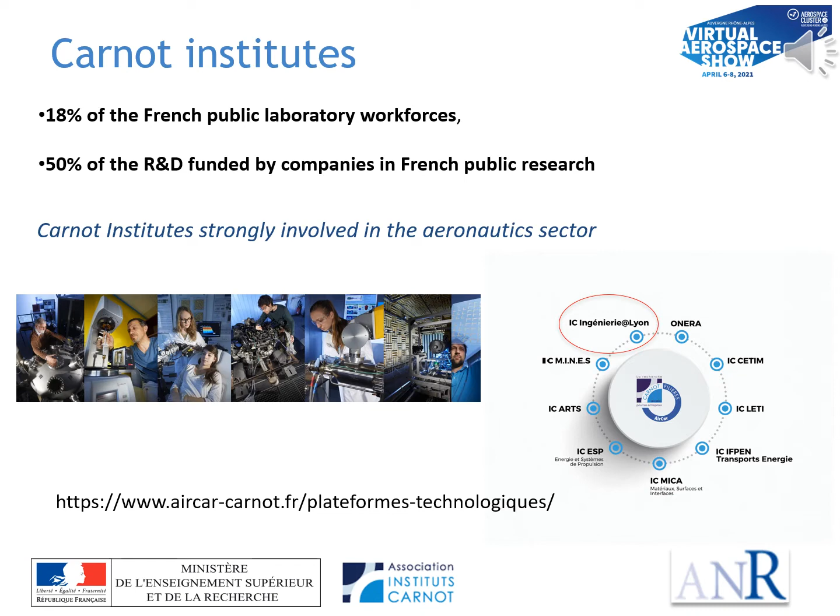Our mission is to support companies in their product and service innovation effort. Ingénierie Lyon is a group of 13 French public research laboratories and 2 technical centers of excellence located in Lyon and Saint-Étienne. All of our laboratories are accredited to the research tax credit, so the industrial partner may deduct 60% of its research and development spending in the frame of an R&D collaboration between the research public labs and the private company. It is always more interesting than in Germany or Switzerland, for instance.

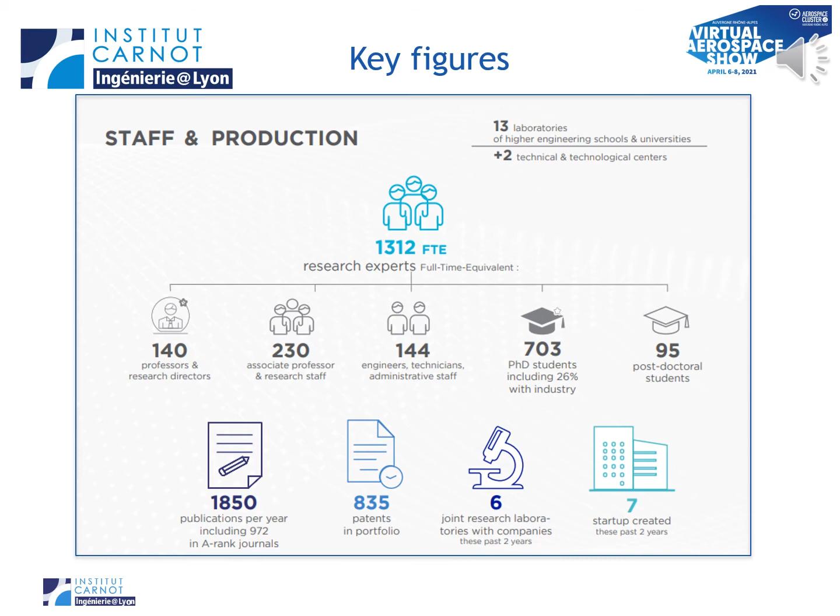You can see on this slide some key figures of our organizations in terms of means and human resources. You can see that our labs produce very high publication levels. The main research collaborations between our labs and private companies are 3-year contracts, such as doctoral theses with PhD students supported by research experts.

Concurrently, Ingénierie Lyon gives companies access to more than 1,300 experts and high-level research equipment in the field of innovative materials and processes, smart machines, and engineering for health.

Now, if we focus on Ingénierie Lyon activities regarding the aeronautic field, you can see on this board that a few tens of millions of euros of research contracts between all labs and industrial partners have already been carried out over the last 10 years. Here we talk about a long-term approach, with shared labs with these industrial partners, industrial research chairs in the national or European frame. Thematic addresses concern aeroacoustics, mechanical transmissions, high-performance composites, structural health monitoring, lubricated interfaces, but also power electronics for aeronautic issues.

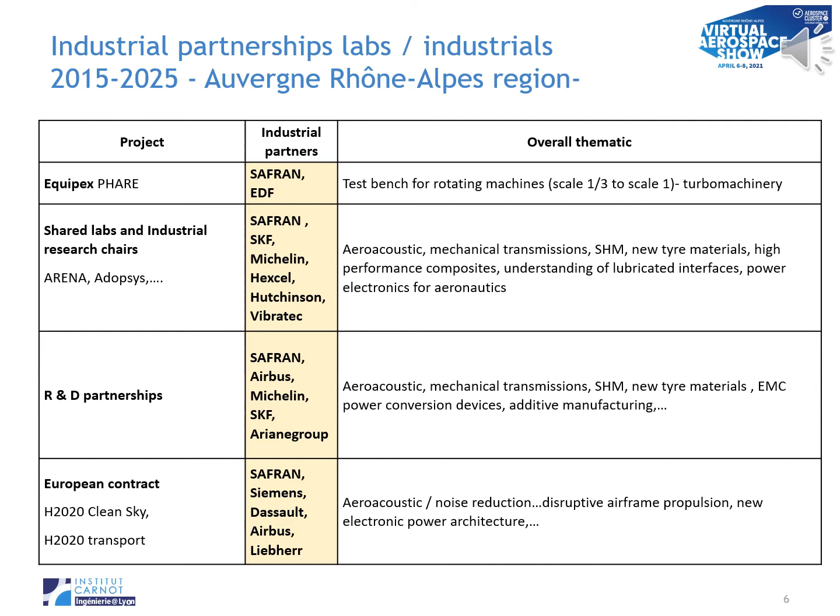So, what is the current state of play? Between 1990 and 2016, worldwide aviation CO2 emissions more than doubled. The growth rates currently forecast and the historical rate of technological improvements will lead to aviation global CO2 emissions tripling by 2050. According to the IPCC, aviation radiative forcing is 3 to 5% of the total anthropogenic radiative forcing due to global human activities.

A climate warming scenario limited to 1.5 degrees is pointed out by the European Commission in a recent report. This report highlights the pressing need for deep decarbonization. It shows the scale of the contribution from various sectors, including transport. This report shows clearly the challenge for aviation and the need to tackle emissions using advanced technology and fuels. Whatever the forecasts, the issue is well-being, resilience, and sustainability.

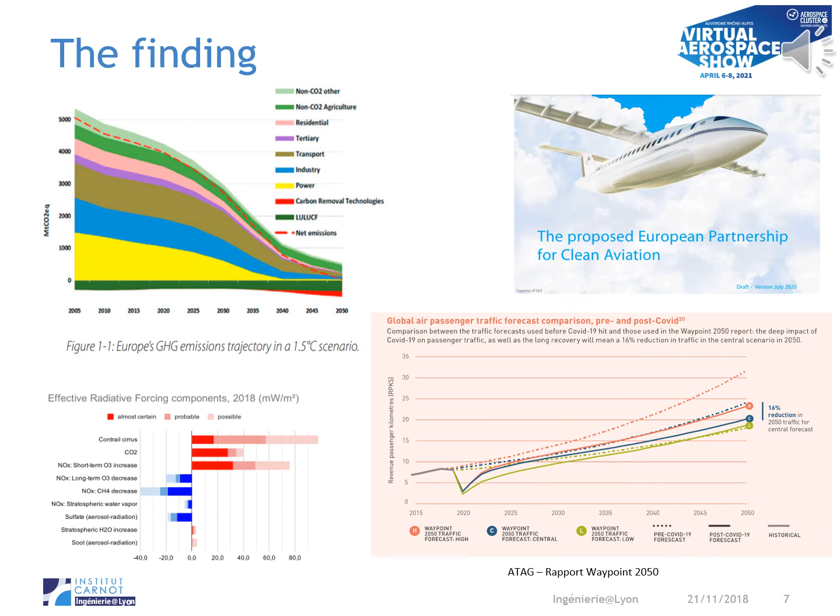The challenges of the aircraft of the future, which aim to accelerate and demonstrate integrated technologies for the decarbonization of aeronautics while ensuring safety and security, are the 5 described on this slide: new aircraft architectures, new propulsion architectures, advanced materials, systems for efficiency on board, energy management, reduction of noise, and non-CO2 emissions.

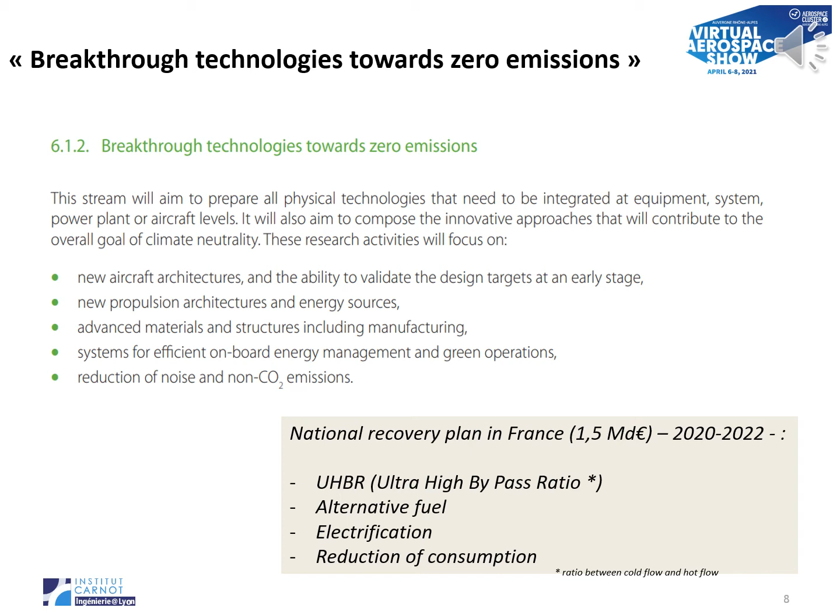You can also notice that there is a national recovery plan in France managed by the CORAC organism. This is the first short-term program, between 2020 and 2022. This program deals with 4 main thematics: high dilution engine, alternative fuels such as hydrogen technologies, electrification of appliances, and reduction of consumption.

You can see on this slide the skills matrix for clean aviation of A-level labs that are direct members of Ingénierie Lyon Carnot Institute, regarding the 5 issues identified by Europe. The field of expertise covered is quite large and addresses propulsion, materials, and critical phase optimization. I will be pleased to give you details of the content of this matrix later.

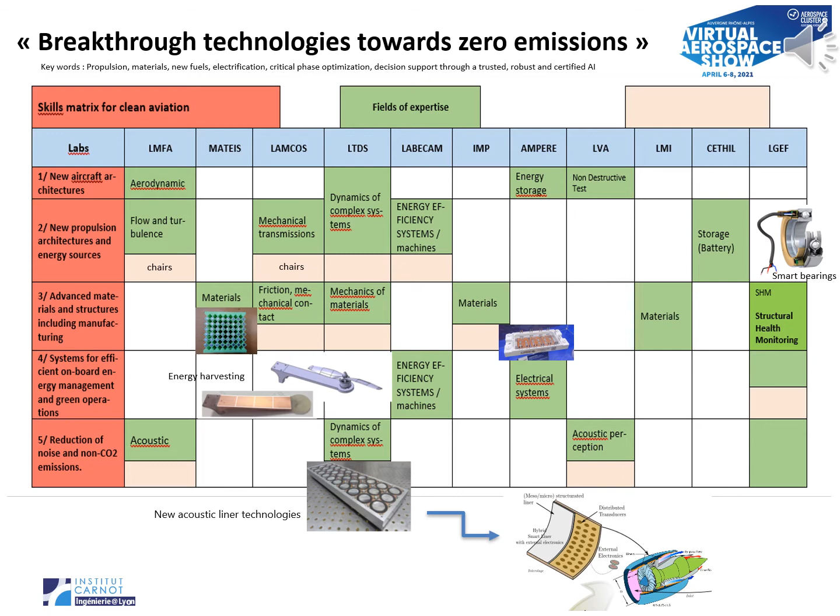As I said previously, I'm now going to show you 4 concrete examples of innovations directly linked to the 5 issues. The first example concerns new acoustic liner technologies. The Salute project is funded by Europe H2020 Clean Sky 2 program, grant agreement number 821093. Clean Sky is the largest European research program developing innovative cutting-edge technology aimed at reducing CO2, gas emissions, and noise levels produced by aircraft. Salute means Smart Acoustic Lining for UHBR Technologies engines.

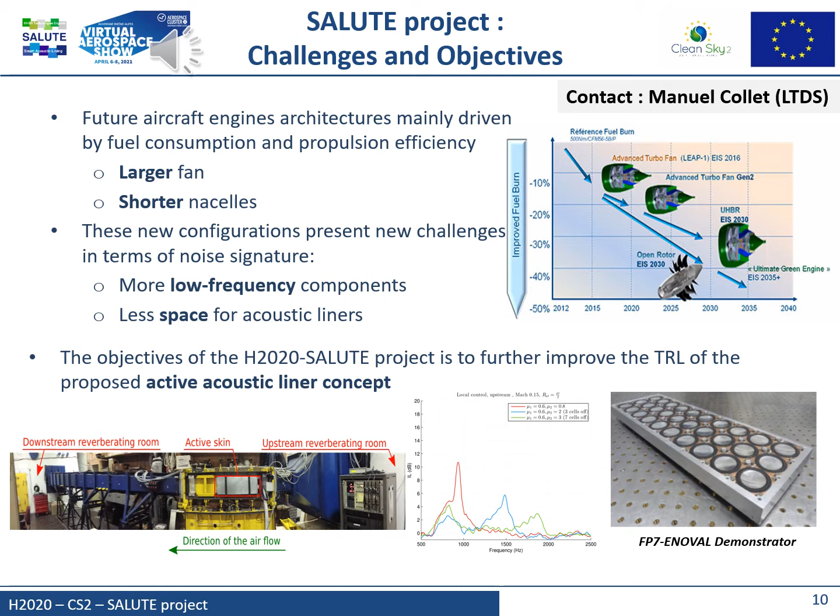New acoustic liner technologies are based on arrays of unit cells. Each unit cell is the assembly of a transducer, 5 microphones, and a control card with localized or distributed control strategies. The grazing flow test campaign comprises acoustics and aerodynamics measurements to characterize the aeroacoustic flow conditions, the membrane behavior, the acoustic impedance, and the resulting insertion loss.

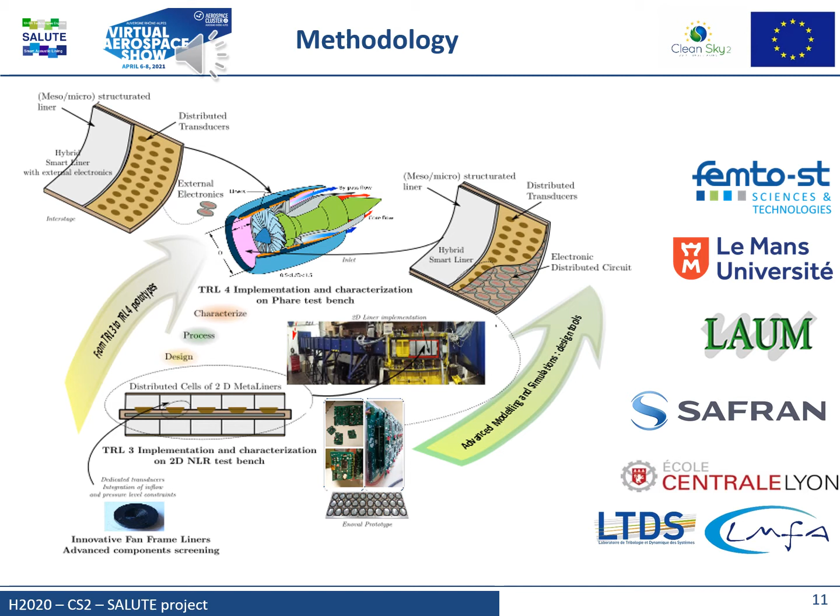At the end, theoretical and numerical investigations are carried out for designing innovative specimens. Specific focus is placed on the realization of prototypes for evaluating the metacomposite liner performances in 2-dimension or 3-dimension liners, its process complexity and robustness. The insight gained in this project is new tools for obtaining innovative samples. The acoustical experimental tests demonstrate efficiency and robustness of such technology for controlling UHBR noise emission.

Second example concerns structural health monitoring. In aeronautics and aerospace, there is a growing need for new sensor materials suitable for direct health condition monitoring of complex structures.

Piezoelectric materials, because of their ability to translate a mechanical impulse into an electric response, are commonly used as sensors in vibration monitoring, impact detection, and ultrasonic receiving sensors.

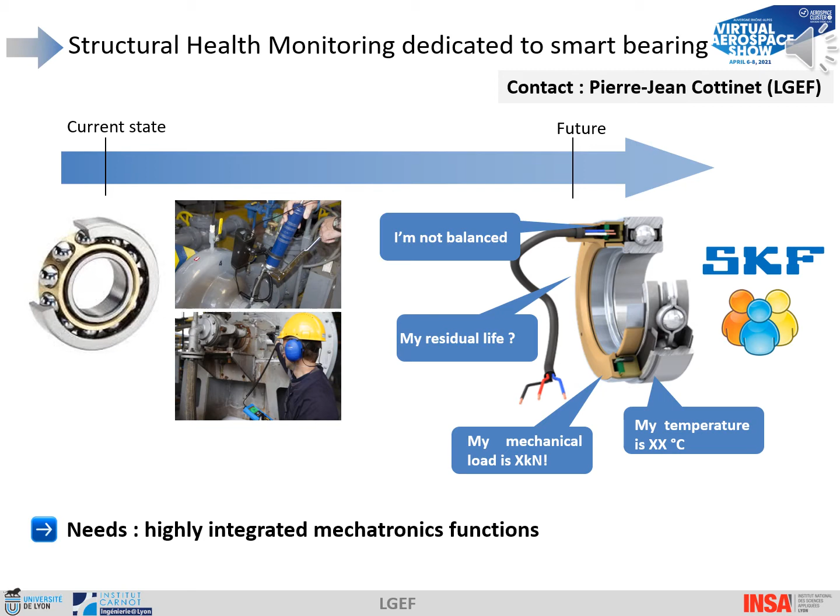The study made by LGEF laboratory focuses on the development of a piezoelectric sensor coating made of silicone matrix filled with PZT particles using electrophoresis. To be simply integrated into intricate systems, these sensors must also be lightweight, non-intrusive for the structure, with high mechanical resistance and easy processability.

In some specific applications, sensors based on electroactive materials can be printed to be used in additive manufacturing.

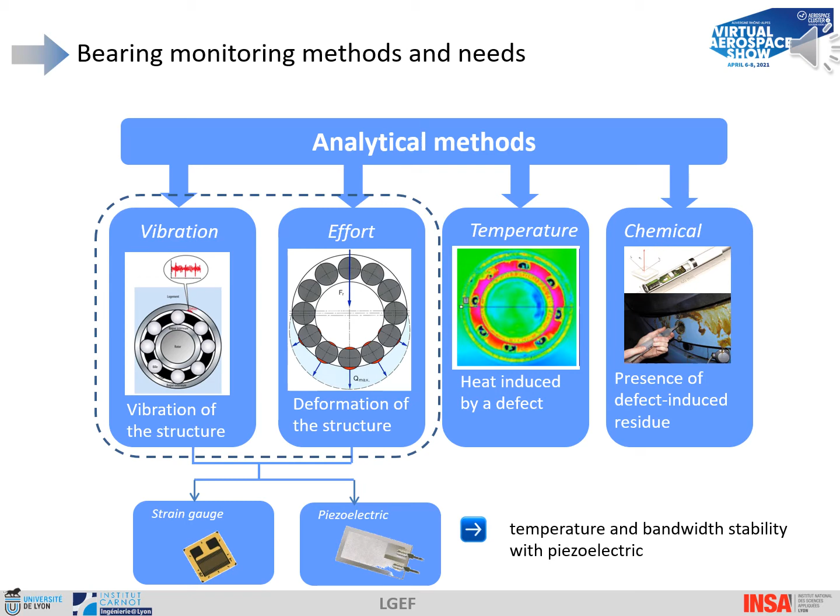Piezoelectric composites are the most suitable materials for the smart bearings application. They are able to combine the piezoelectric properties of the filler with the flexibility of the matrix. Here, PZT powder and silicone base were mixed by ultrasonication. Then an AC electric field was applied to the sample's electrodes, leading to the formation of aligned particle chains along the poling direction.

The implementation of the piezoelectric layer on the bearing is shown here. Developed sensors are integrated into the ring of the bearing, allowing condition monitoring of the bearing. Signals from the sensor are processed in a printed circuit board (PCB) to provide a more robust output signal.

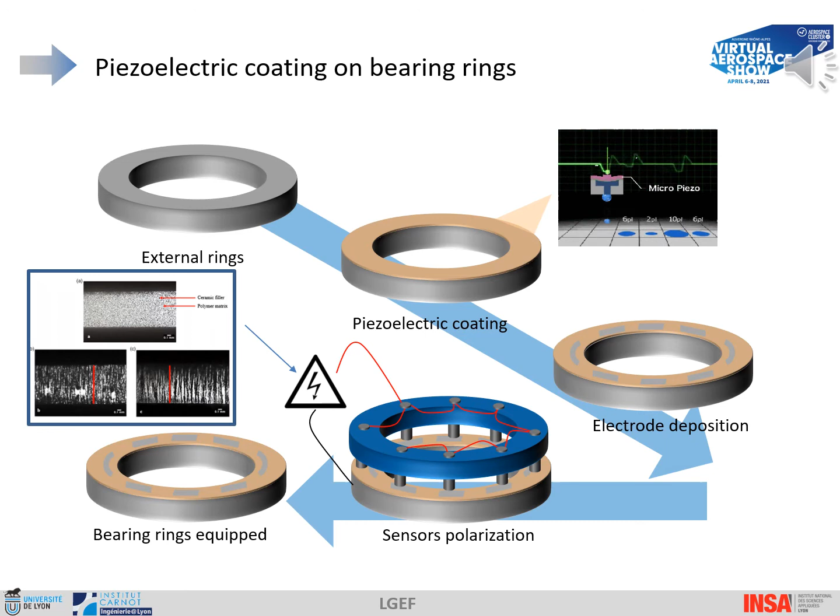On one hand, you can have access to vibratory measurements. Vibration measurements are related to defects in the bearings. Here, the thermal stability of piezoelectric response reveals that composites maintain their piezoelectric activity even at 200 degrees Celsius.

The curves show the sensing response of the piezoelectric coating compared with that of a classical accelerometer. From a temporal point of view, both signals have a similar appearance of vibrations. It means relatively small and steady amplitude before rotation and then significantly varying and increasing amplitude during rotational movement.

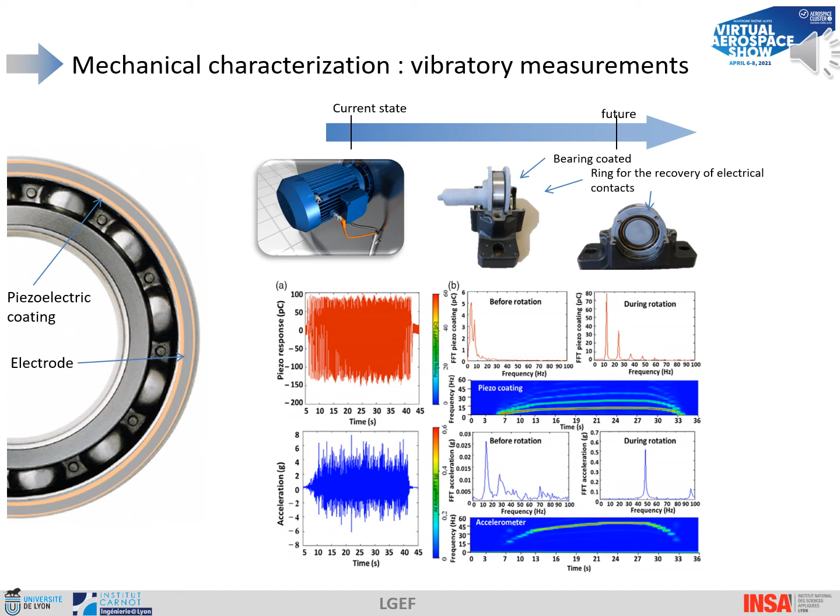So at the end, depositing the piezoelectric element on the ring allows us to detect local vibration signs of imminent bearing failure, with the benefit of being a cheaper alternative to common accelerometers.

On the other hand, knowledge of the load level of a local deformation bearing, so knowledge of the effort, can be directly linked to the lifetime of bearings.

In this third example, the challenge was to explore different parts of an unmanned aerial vehicle in order to recover some energy through a harvesting approach. Three laboratories worked together during this study, and the LaMCoS laboratory at Ingénierie Lyon carried out the experiments. The dual objectives were energy recovery and vibration control.

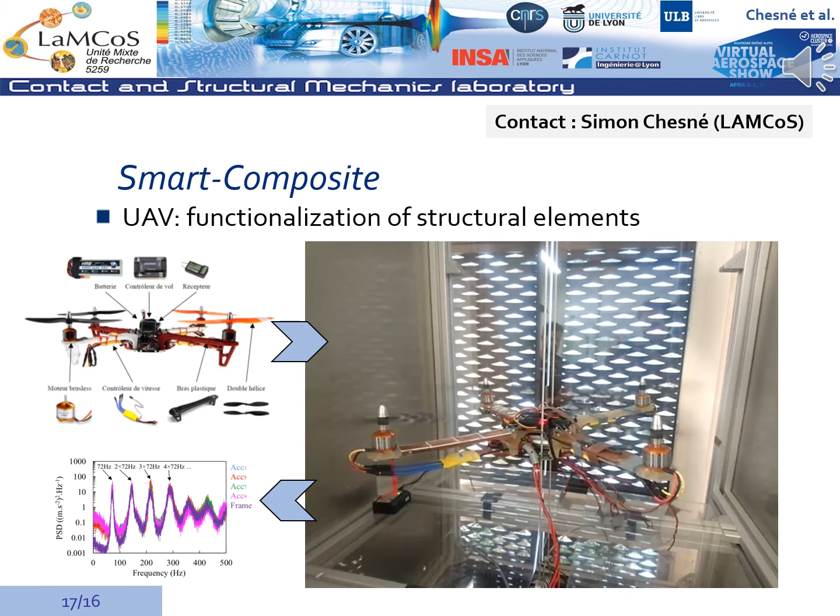First step of the work was the optimization of transducer networks according to the dynamics of the structure and the solicitation. This means a first in-flight characterization step is necessary to identify elements and replicate equivalent dynamics on the unmanned aerial vehicle.

Numerical and experimental vibratory characterization during flight have been made, coupling with transducers. This is reproduced with similar dynamic conditions. Different configurations with commercial piezoelectric sensors and piezoelectric paints developed by one of the labs have been tested. At the end, the optimized configuration is able to generate a few milliwatts.

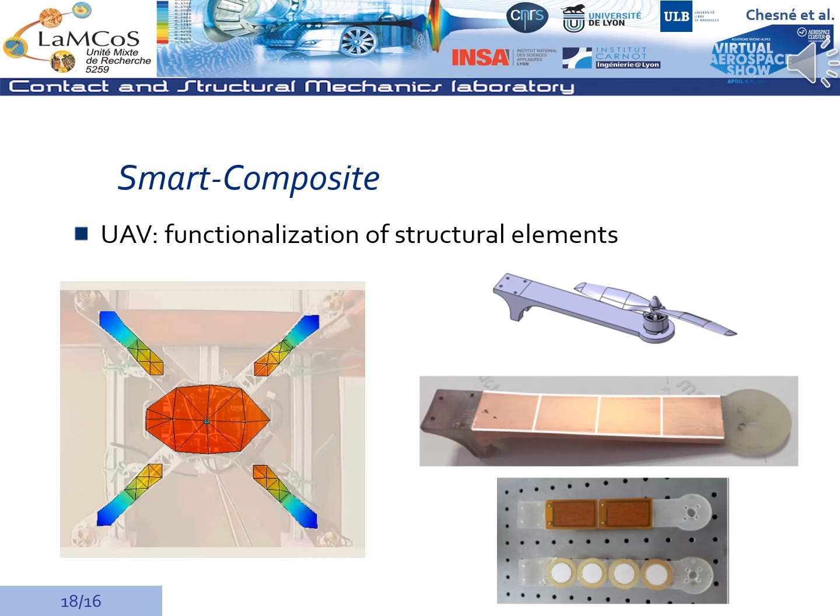The fourth example deals with energy management. If we consider energy management on board, now and in the frame of the more electric aircraft, we see that the total weight of the aircraft is decreased by the fact that hydraulic and pneumatic actuators are less and less present on the aircraft. Ampere Laboratory, a member of Ingénierie Lyon, has worked for a long time on new electric power architecture and power converters.

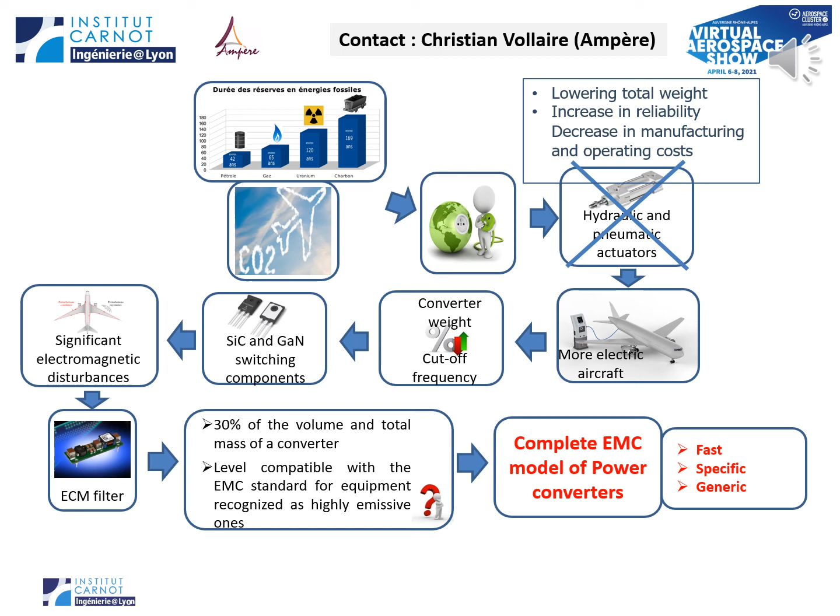Ampere Laboratory is able to optimize and carry out a complete EMC model of power converters. Due to the increase of onboard power systems, we have to optimize the solutions for filtering disturbances. These EMC countermeasures represent a significant rate that should be controlled while maintaining good safety of operation, and that's the huge challenge. Two EMC modeling approaches for aircraft energy management systems are well known by Ampere Laboratory.

The first one is a black box approach, and the second one concerns a predictive approach. Mr. Christian Vollaire from Ampere Laboratory will certainly be happy to answer your questions on these two specific approaches.

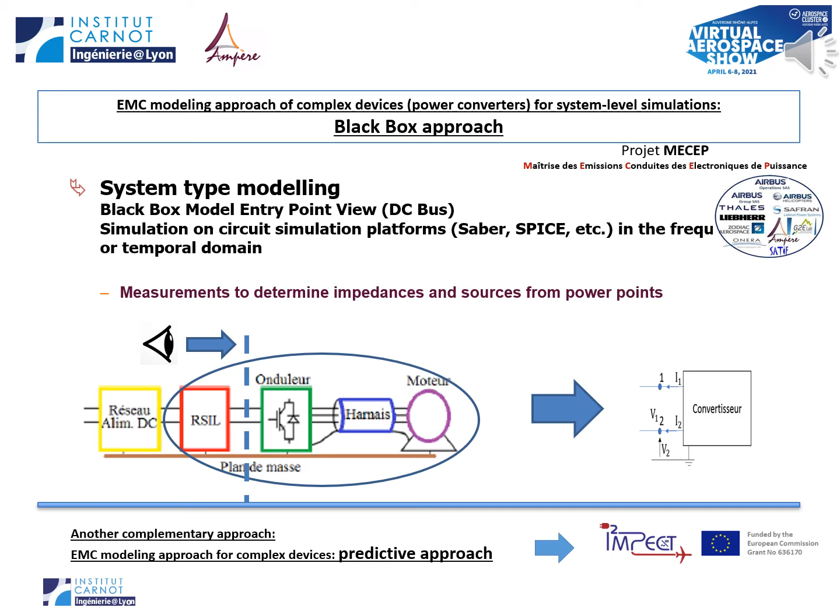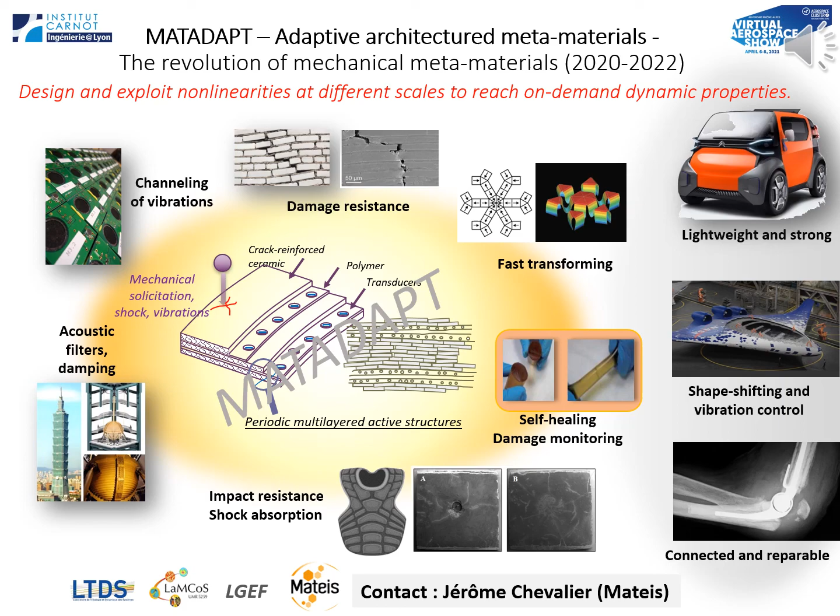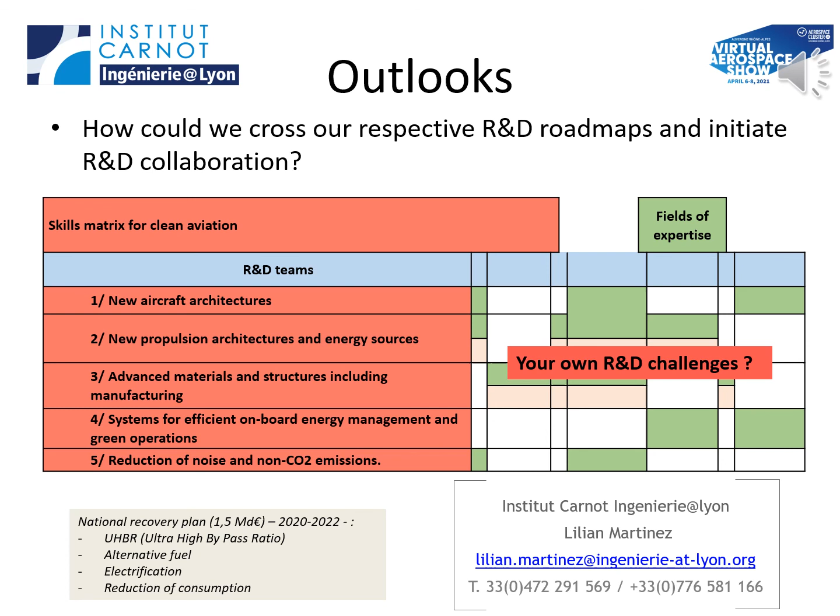So now, I will be pleased to answer any questions from the audience, and maybe ask you: how can we imagine working together? Thank you for your attention.